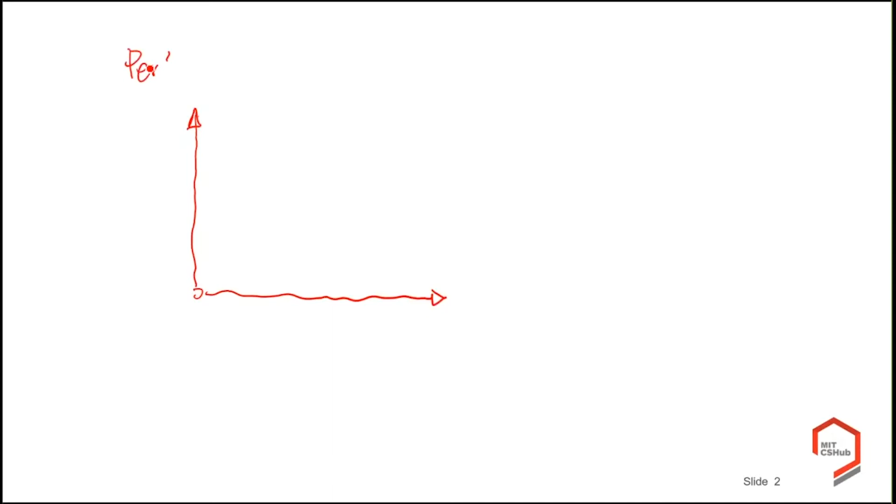So let's get started with the question we all want to address: what is resilience? Since we're in this online mode, I thought I'd start with some drawings about it. How do you define resilience? Since we're a little bit quantitative, we're going to make an XY plot here, where we put on the y-axis the performance of a system—a structure, an economy, social equality—and on the x-axis we put time.

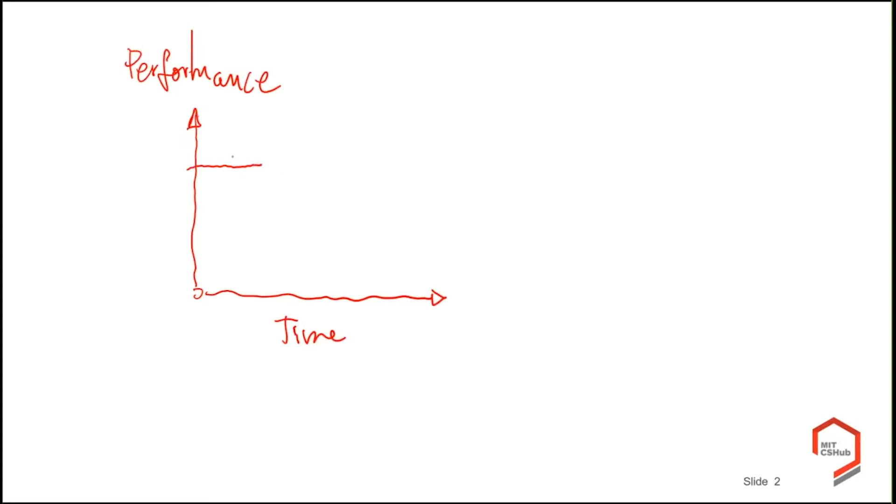Well, we're at a certain stage initially, and then an extreme event happens. You know exactly when this happened for COVID-19, and the system drops down in terms of performance. This drop has to do with the robustness of a system. But if it's robust, of course the drop will be less.

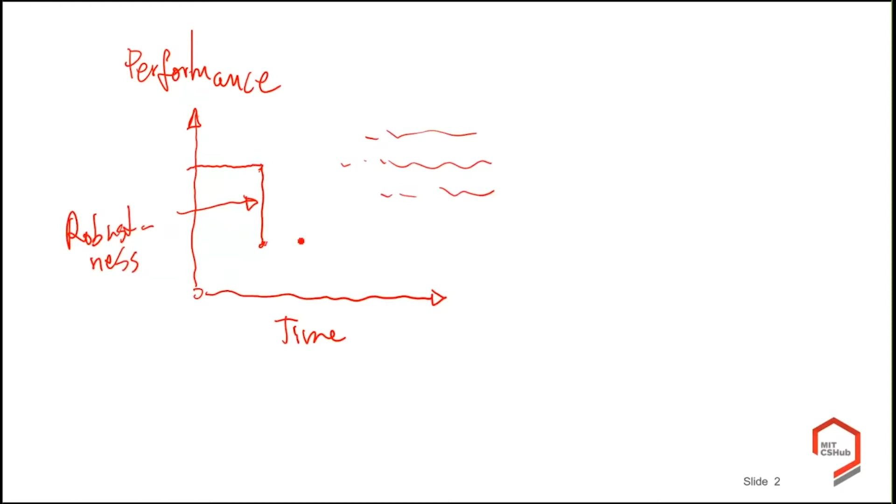But if such a system comes down, there's a second, very important part: what is the recovery? The recovery would be either to the same level or a higher level, wherever you'd like to have it. The question is, how fast are we able to bring this back to the same or higher performance of the system? Very important here for all of us in this current crisis is to ask yourself: what is the time to recovery?

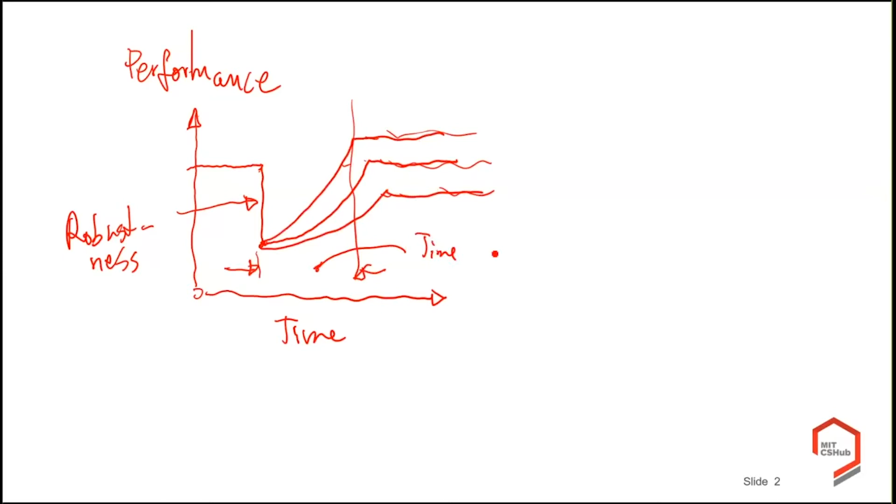Time to recovery is a very important topic for all of us. Currently, we know exactly what that means in the current crisis. But what I'd like to share with you today are the results which come out of this thinking of resilience in terms of building stock—national building stock, as well as community scale and city scale. So don't worry, I won't continue with my bad handwriting, and will carry on with my presentation.

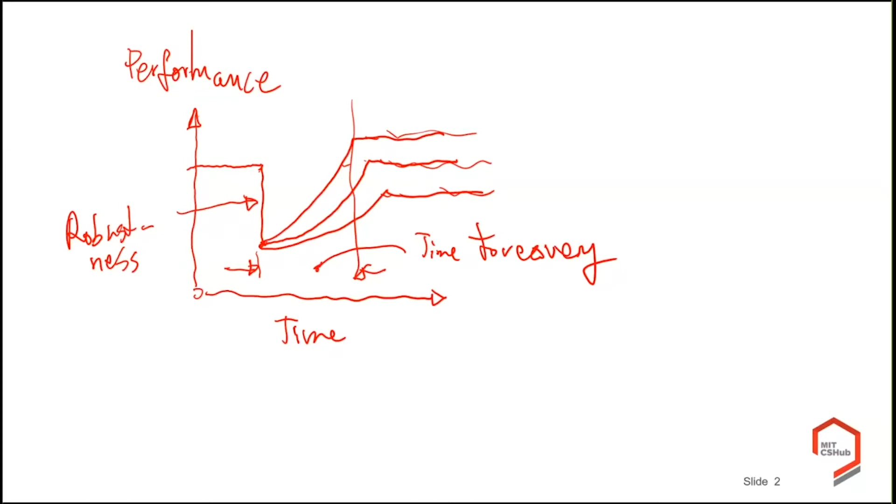So here you see the graph in a perfect shape. Resilience, in essence, is the time it takes to bring a system, after an extreme event, back to the same or higher performance. The systems we consider are cities, buildings, structural and non-structural elements of buildings, all the way down to construction materials. Otherwise said, it's a true multi-scale approach. The events we consider here are hurricanes, earthquakes, precipitation, flooding, and fire.

So our focus of research into resilience in the CSHub goes from the building scale to the community scale and to city scale, to address a critical thing: what is the return on investment if we invest in resilience of the building stock?

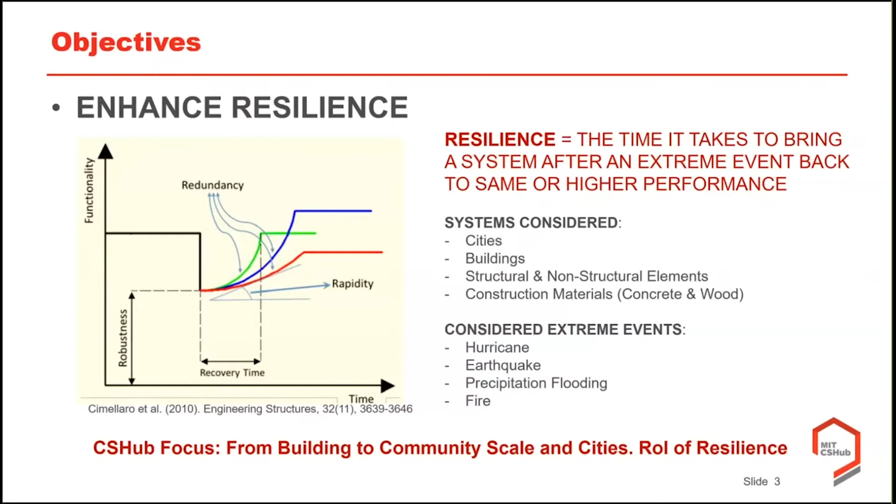So the topics I'd like to touch on today are: first, give you an update on where we're headed with hurricanes—the hurricane season just started a couple of weeks ago. And in past presentations on this topic, I hope I was able to convince you, if you were there, that city texture matters critically when it comes to the response at the city scale of building performance.

The second topic, closely related but going away from pure wind load, is precipitation flooding, which often comes with these extreme events. Here, the key question is how to quantify the flooding, or the damage caused by flooding, due to the time of flood exposure, and we want to address this also in relationship with city texture.

Finally, I'm going to address a topic of high importance for many of you, which is fire, high temperature exposures of buildings, be it for safety reasons, when you are a firefighter or an inhabitant of a building, or whether it is at a community scale, where you ask yourself, will there be a spread of fire?

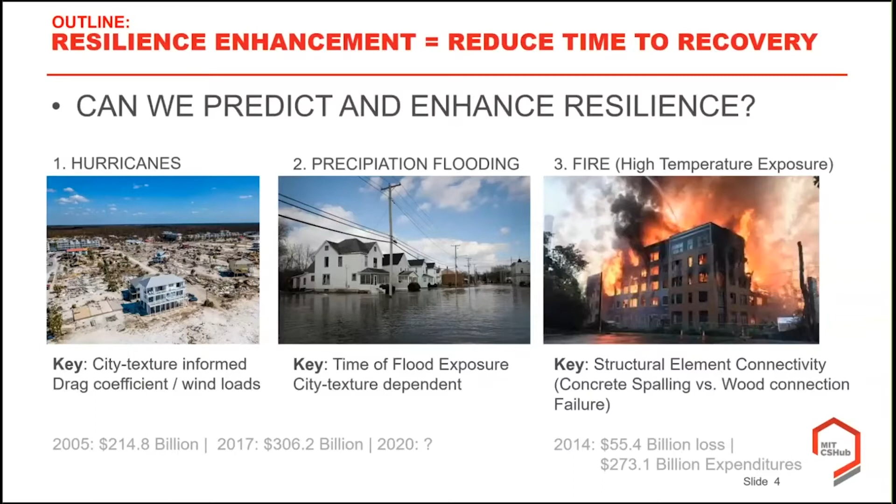So with this in mind, let me start with the first topic, which is hurricanes, from city texture to social impact. The question I ultimately want to address is the socioeconomic impact of hurricanes and how one can reduce it.

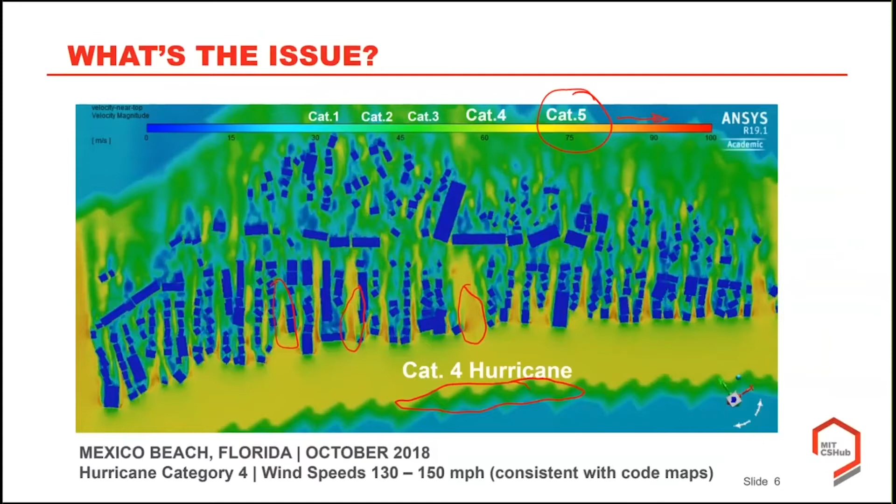What is the particularity of our approach? The current approach used in design codes is basically to design buildings for a wind pressure P, which scales with the wind speed to the power 2 - the far field wind speeds, which are codified, for instance, by the American Society of Civil Engineers - multiplied by rho, the density, but most importantly here the drag coefficient CD, often taken as a single building value for evaluation of this pressure.

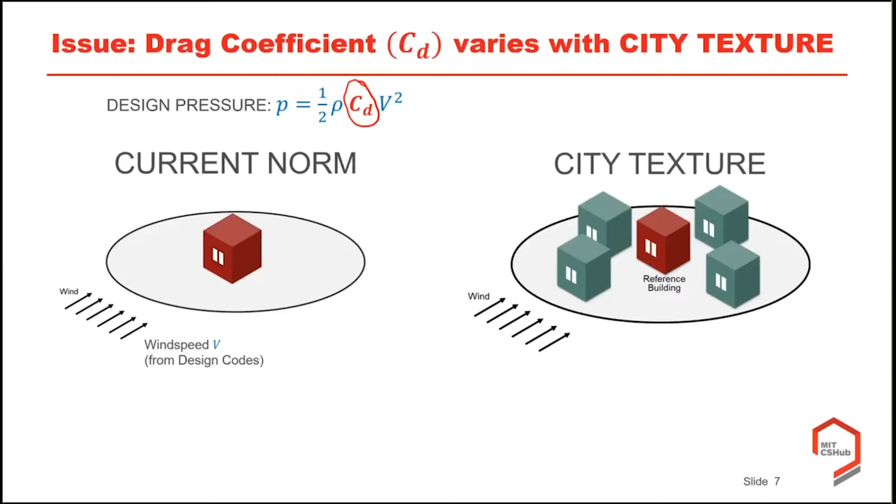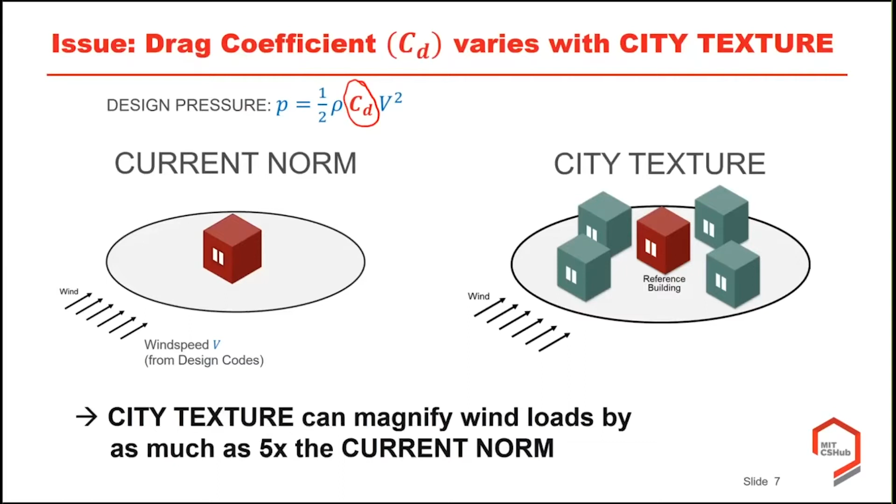This pressure is then used to design the building. What we propose here is to consider, in addition to the far field wind speed, the effect of city texture on a building in its certain environment, its first shell. As we found in this study, city texture can actually magnify the wind loads for which buildings should be designed by a factor as much as 5 times what current design codes require.

Now the approach here, after much work, comes down to evaluating this drag coefficient in the following form, which has two terms. One is the classical term currently in use - this part here. The other is the city texture effect.

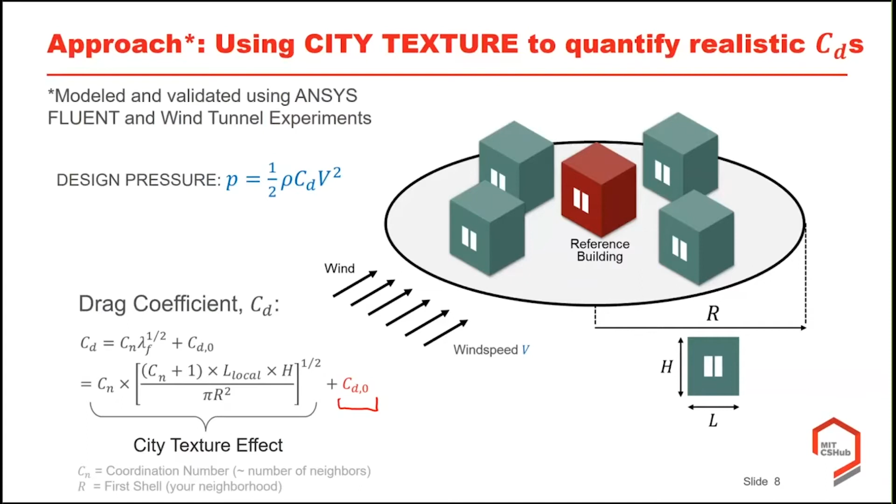That city texture effect has to do with the dimensions of the building or surrounding buildings, particularly at the local scale. But most importantly, two factors come from city texture analysis: CN, called in statistical physics the coordination number, basically referring to the number of neighbors, and R, the first shell, basically the environment in which your building takes place. This data is available and can be calculated for each building using information about building stock readily available on the internet.

So to make my point, if you look just at Mexico Beach, at the drag coefficients of these buildings and evaluate which should have failed because the amplification due to this drag coefficient related to texture was much higher, you can cover something like 67% accuracy of the actually damaged buildings. This means the relevance of this approach is evidenced by the observation that pressure amplification due to city textures is significant.

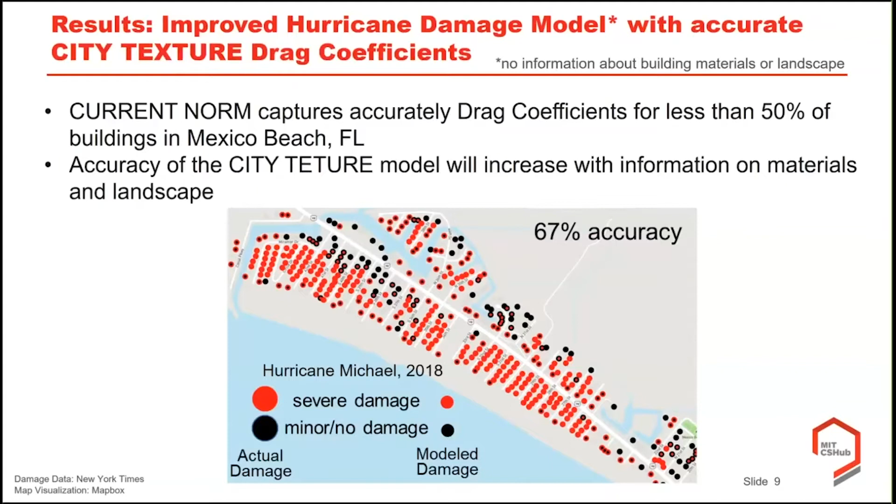More importantly, you can ask yourself what would happen if you now start redesigning the city. In fact, you look at taking out buildings and seeing how the number of neighboring buildings would change, and how that would ultimately affect the drag coefficient.

So you see we have buildings here on the left side. We're taking out a number of individual buildings to reduce the number of neighboring buildings, and by doing so, the drag coefficient reduces. In fact, you may want to see this as a damage curve. If a building is destroyed, what are the other buildings subject to, and why isn't everything destroyed after a hurricane?

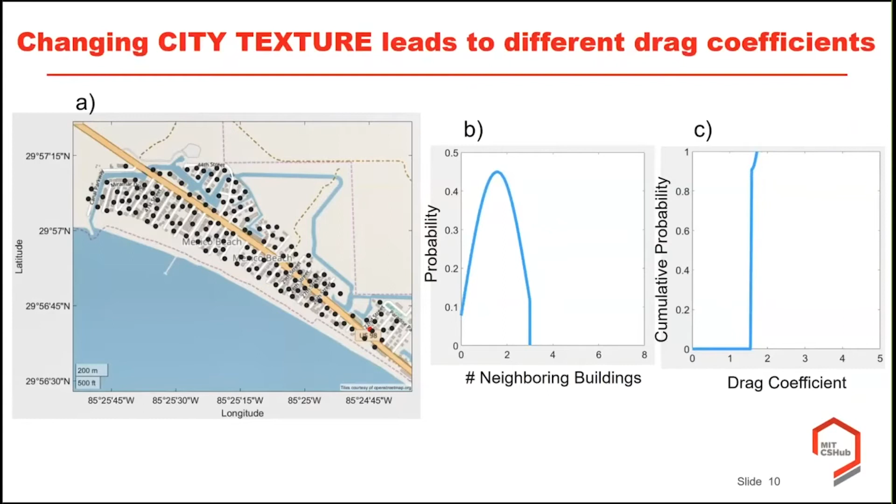In fact, the key question here, which comes out from these simulations, is that we can either think about redesigning our cities, which is unlikely because we cannot reduce the density of the cities in much way, but more importantly, thinking about how to design our building stock more safely by taking into account these city texture effects.

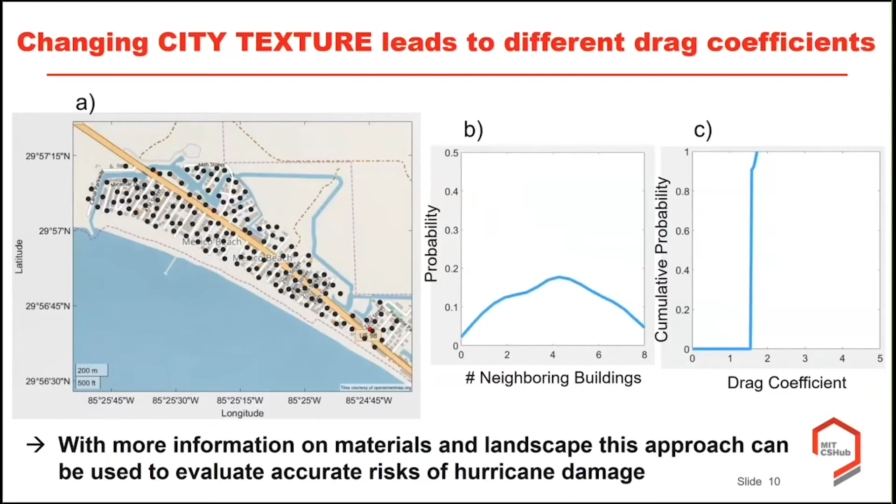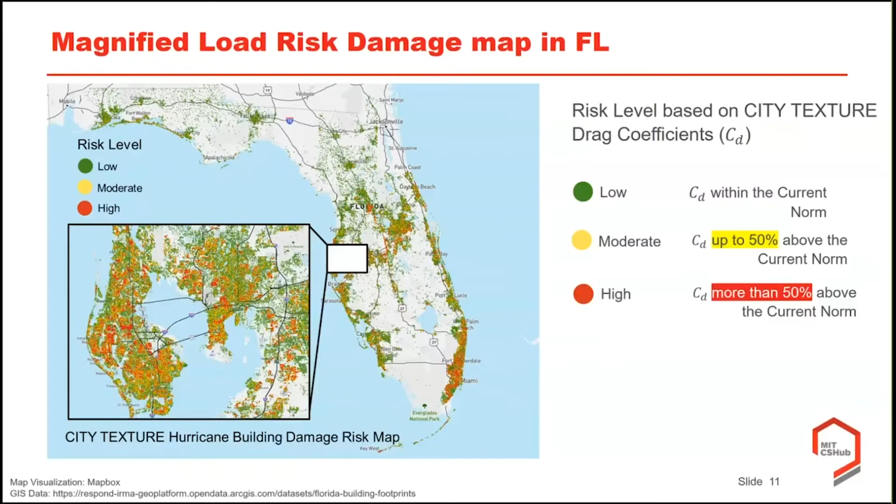Wind speeds amplified by city texture. And you see that some neighborhoods may be at much higher risk of damage. You see it here in red. Many other buildings will not be.

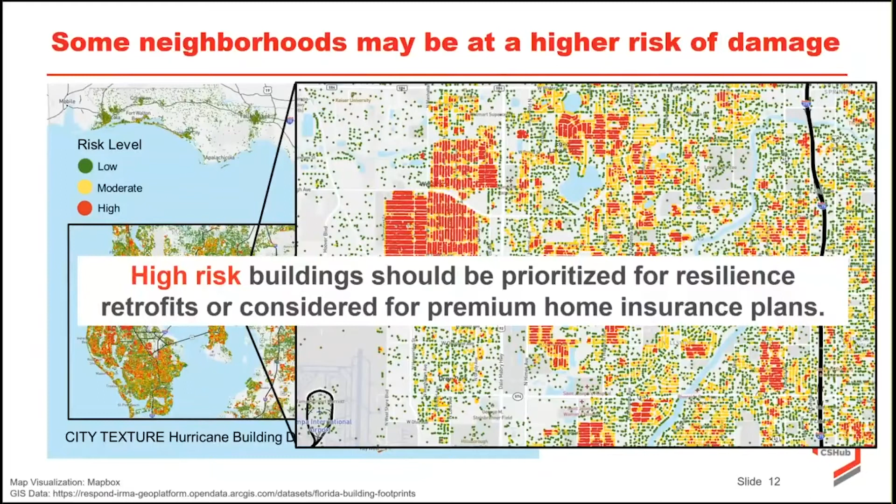So there is a clear impact here, which is that high-risk buildings should definitely be prioritized for resilience retrofits, or eventually considered for premium home insurance plans. Otherwise said, there needs to be some action in order to retrofit our building stock to reduce this high risk of damage due to city texture effects, the way how we like to live and build our building stock.

But what are we missing here? We haven't talked yet about the building itself, what happens to each one of those buildings, and that's critical information as we bring the topic back to resilience and want to know what is the time to recovery.

So we need two more pieces of information. One is the damage inventory for each individual building, and the other is a link with the bill of activity in order to identify the benefits of mitigation by resilience enhancement.

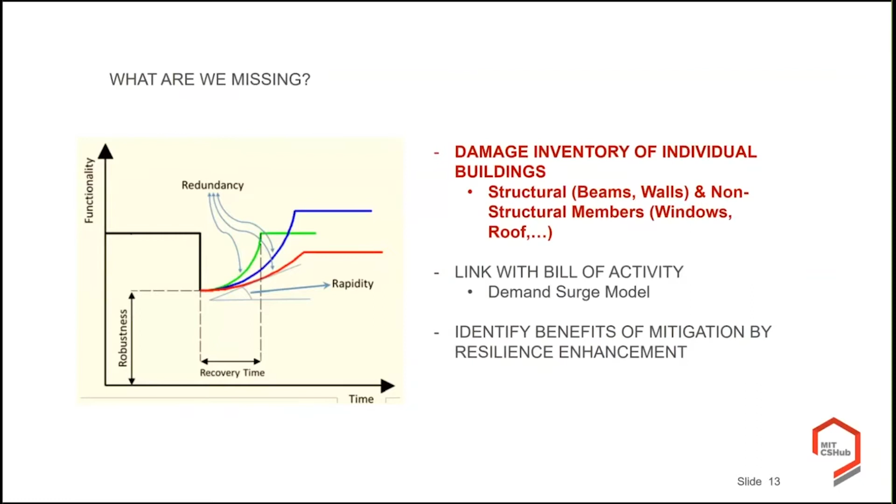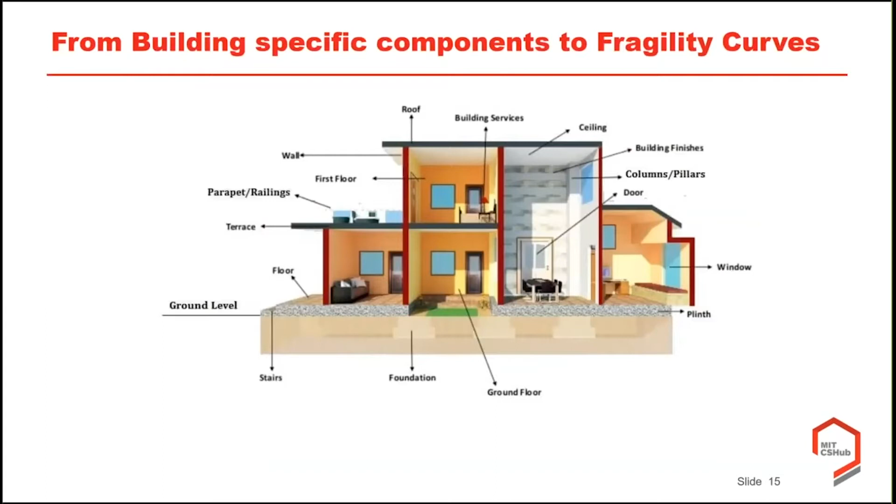So fragility curves here consider all the different building-specific components, including structural and non-structural members. An example of our approach is illustrated here in this five-story building. We discretize the structure in terms of masses and put all the information we need in the bonds, in the connections of the beams, walls, windows, roofs of the system.

Here, the example considers a core or not. I'm going to show you some simulations with a core in order to develop a quantitative means of determining what is the risk of damage from a probabilistic point of view to these structures.

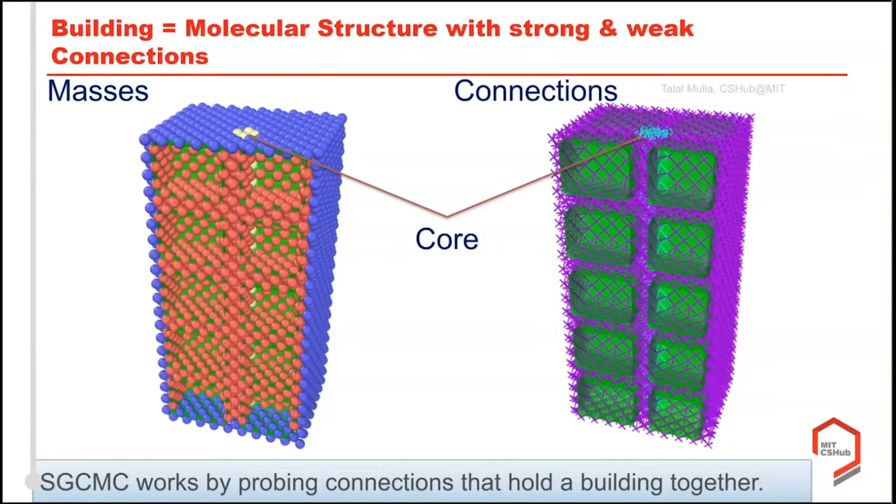So my first structure here I want to show you to illustrate this approach is a typical reinforced concrete structure which has interior walls, a building envelope, and so on. And what the approach actually does is we probe all possible connections and see which ones are most likely to fracture given a certain load which we have in the system.

So damage, and you see here in different colors the failure of the interior walls, some elements of the building envelope, but the building core here for this concrete structure is completely untouched.

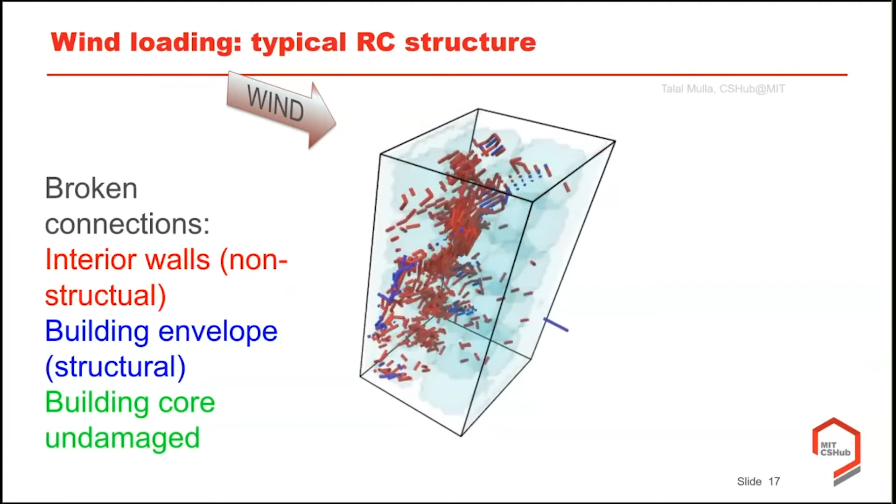So despite the fact that both structures were designed for the same maximum load, given these wind loads we're able to quantify the likelihood of damage to structural or non-structural members. Just as a last example, what would happen if this was a wood structure without a core?

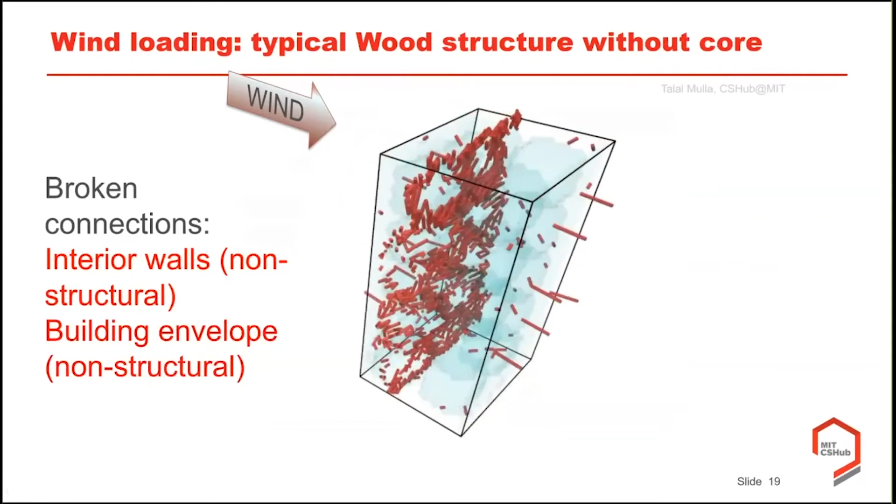The interior walls would still be non-structural, and the building envelope also non-structural, but with walls in there. You basically find out how the structure fails. This is not a structure you would design, of course, in this form, so you have a high level of damage.

All this allows us to qualitatively classify, for reinforced concrete structure versus wood without structural core, for this particular example, from no damage to high damage of the system.

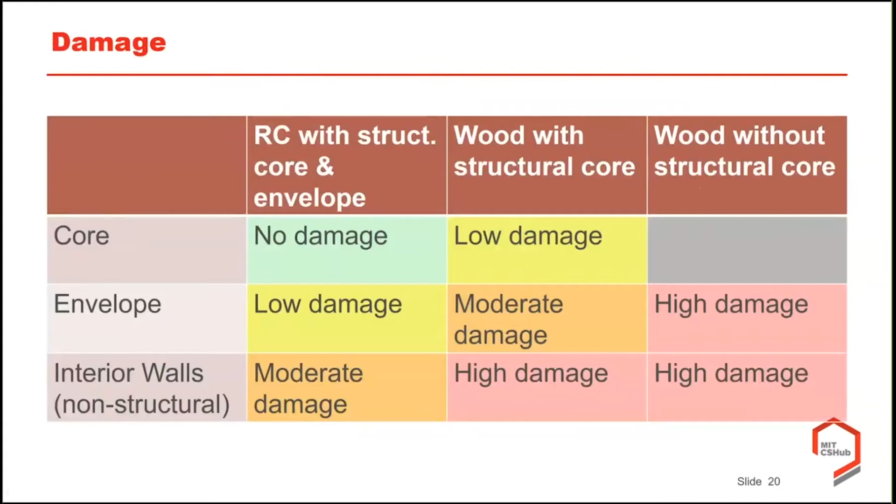But more quantitatively, we took all this which comes out from simulations into fragility curves, which express the probability of exceeding damage in the building. If you take this probability of exceeding for any type of value, so a horizontal line into the system, you will find that...

the inventory, the one which is first touched is the wood, until it comes to reinforced concrete structures. Otherwise said, we can synthesize into material-specific building type fragility curves the information, and use them for different buildings, integrating the failure of non-structural and structural members.

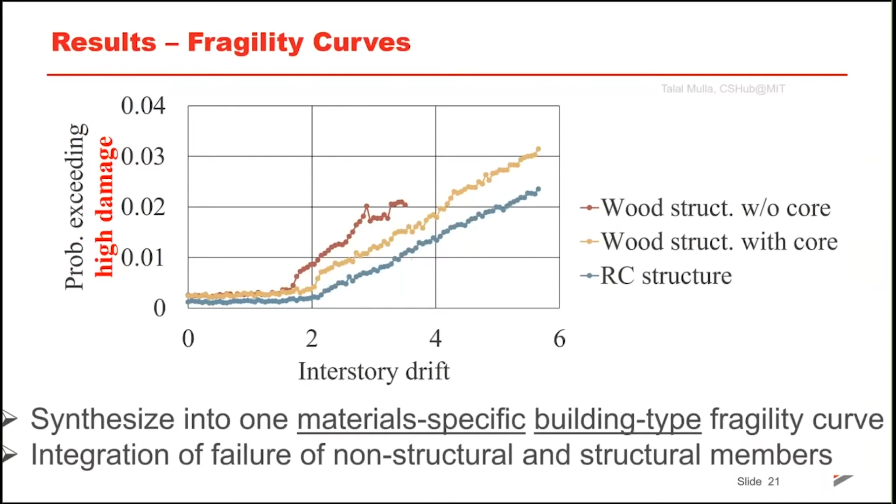Now, with this in mind, we can take it to the next level and connect this damage inventory by linking it with the bill of activity, while considering that after an extreme event there's a demand surge, simply due to the fact that you don't have enough carpenters to work on repairing the damage, so the prices simply go up.

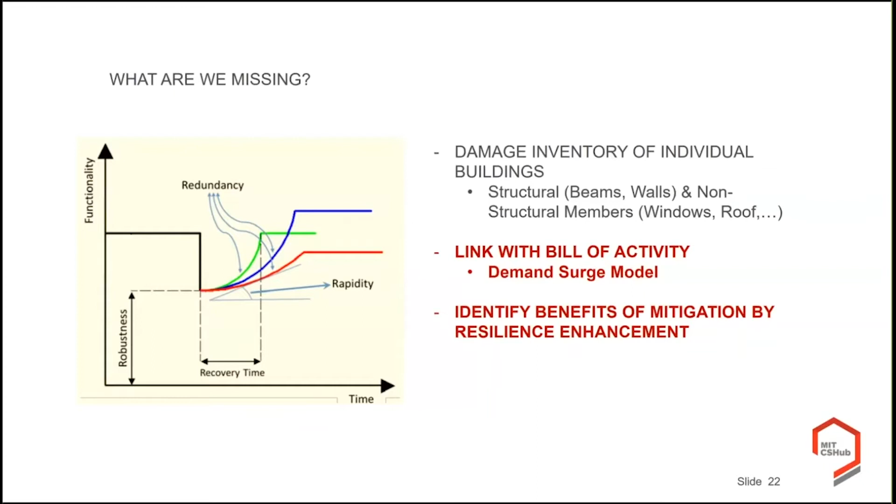Combining the damage inventory with this bill of activity provides us, for each building, a means of evaluating the benefit if we were to mitigate via resilience enhancement. This is some work done by Ipek Bensu Manav in the CSHub, which basically integrates the following.

One is the hazard risk, which is simply the probability of occurrence of a hurricane. What's currently done is consideration of surface roughness or terrain, but in addition, what we now consider is this urban texture effect, which I started with today.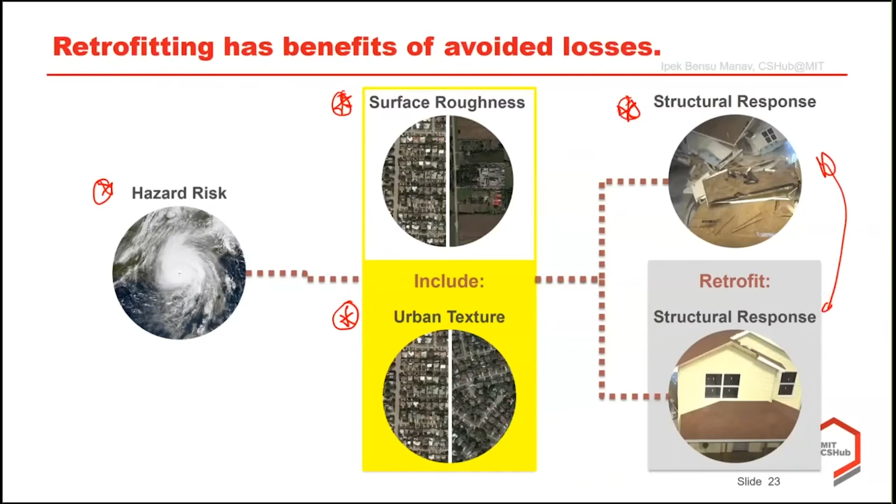Finally, we determine the structural response for each of those buildings, and then look at what would be the means of retrofitting these structures in order to reduce the damage, by means of the fragility curves, changing them from the original solution to a retrofitted solution.

What turns out is, if we consider this city texture approach, this texture-informed approach, the statewide benefits which result from mitigating the damage quickly increase. For instance, in the classical approach, without considering city texture, there would be, for the state of Florida, maybe on the order of...

2.6 million homes that have a payback within one year, and the total statewide benefits would be on the order of $4.8 billion per year.

By contrast, if you consider the texture-informed approach, such an investment actually has a much higher return, both at the state level and for individuals, as statewide benefits are up to almost $20 billion a year, and we're talking about 4.2 million homes having a payback within one year, given the high level of hurricane risk.

We can take this all the way to the state and look at the benefits of mitigating hurricane damage by means of this resilience enhancement, to map at the state scale the dollar amount which households obtain, and identify the areas where mitigation would have the highest financial impact for individuals.

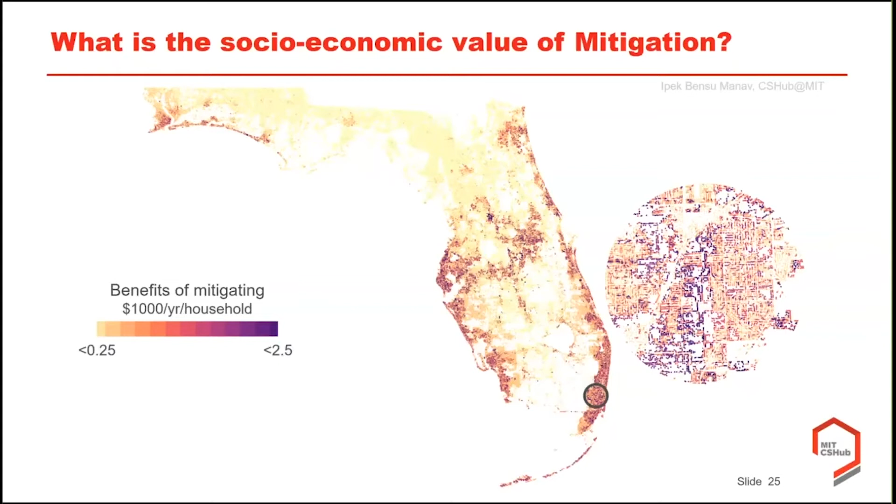A similar approach which you've now seen for hurricane can be applied to precipitation flooding, which is the next research project we started last year in September, looking into the impact of city topology and texture related to precipitation flooding. Now, a word about the classical approach to how precipitation...

flooding is typically addressed, and commercially available solutions are based on so-called shallow water equations in most cases, consisting of following the flooding, or the height of water over terrain, in time and space, considering different issues like the 3D terrain network, soil condition, permeable or non-permeable surfaces, structural objects, bridges, pipework, etc. But this would be for a very particular city or area, in order to determine what the risk of flooding is.

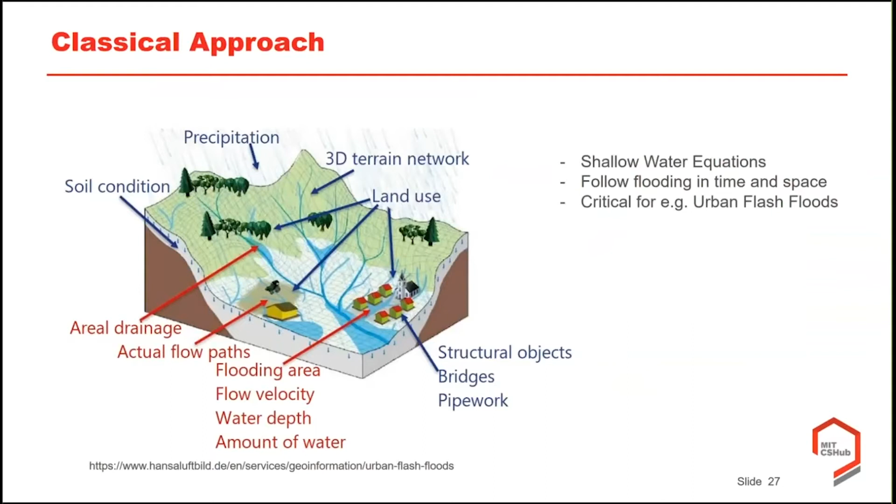It is critical if you're looking into urban flash floods, for instance, where you need to take into account the relatively short time of the precipitation, which entails, for different reasons, a flood locally in a city. Now, what we are looking at is slightly different.

What we are interested in here is the damage, to evaluate and estimate the damage, where we look at the time of flood exposure. The longer the time of flood exposure occurs, the more damage it will do to the structure. So a key question our approach looks into is how much flooding is reversible and irreversible in terms of close-to-equilibrium conditions.

The approach we develop here in the hub is based on what's called density functional theory, a technique actually developed for nanoscale adsorption processes. The idea basically is that you put a material in contact with an outside bath defined by some chemical potential, and you ask yourself where, at the small scale structure, this outside liquid or gas will adsorb and develop from this so-called adsorption and desorption isotherms.

Now we adopt a similar type of approach for the flooding problem by analogy, considering all types of features relevant to this problem of precipitation flooding. Meaning, we're interested in buildings, the terrain, the topology of the city terrain, drainage systems, soil type, whether it's low or high permeable, and so on. So what we do here is apply an outside precipitation source to the system, and the simulation technique determines where water will accumulate at equilibrium for each precipitation rate applied. Now this allows us to determine what we have coined flooding drainage isotherms.

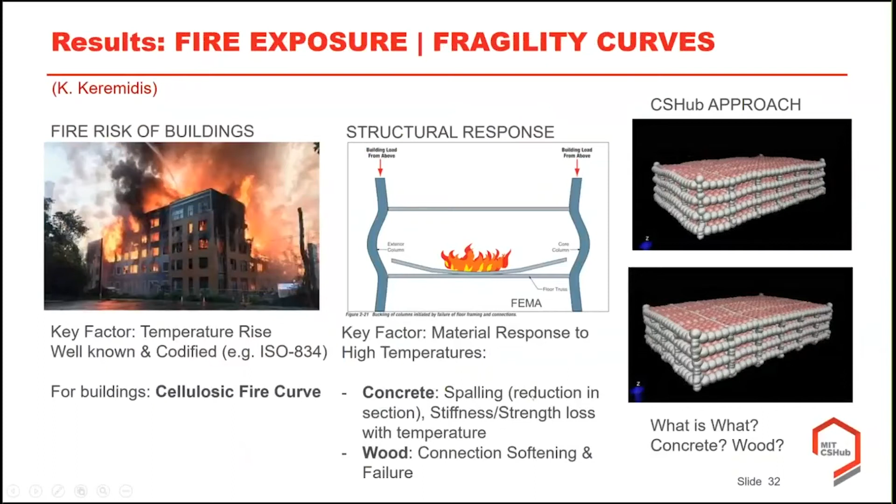So what are the key factors which define fire safety for such buildings? Let's start with wood. Charring typically occurs at 300 Celsius and above, and propagates inside the material. That's what we typically think about when we worry about wood fire. But there are many other phenomena at the material scale, such as material softening behavior, meaning the strength and stiffness of the elements degrade substantially, independent of charring but as a function of temperature. In addition, very critical for wood structures is the softening of the connector resistance when exposed to fire.

When it comes to concrete, the equivalent of charring is thermal spalling, the phenomenon where concrete exposed to high temperature kicks off layers, very similar to the layers of an onion, thus reducing the effective section of the system. In addition, it undergoes material softening, so strength decohesion and stiffness reduction, what we call thermal damage, which are more or less well understood. If you compare the Young's modulus or stiffness with a reference stiffness at 20C, you see this decline with high temperature exposure of materials, as one can find in a laboratory.

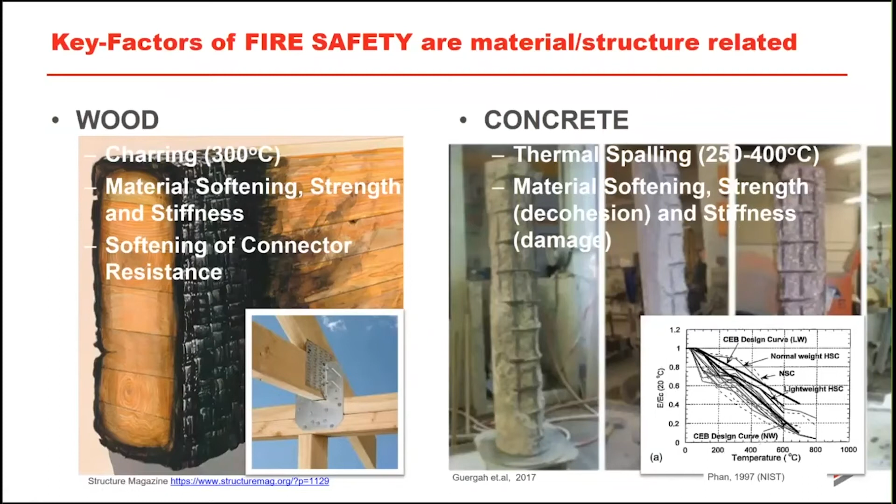So how do we account for that in our approach? Similar to what I showed you before about the molecular approach with wind loads, we use molecular dynamics, a potential of mean field type approach, where we discretize a structure in terms of mass points at some equilibrium configuration, its initial state, and describe the interactions between these mass points by stretch potentials on one side and bending potentials to capture bending elements in such structures. Of course, the key information for these potentials is the type of material and the type of structural use or element being taken into account.

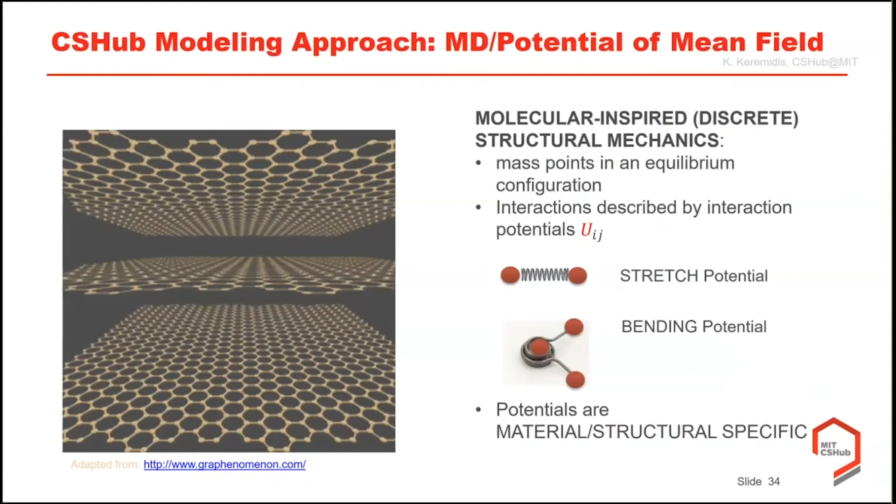To show you this interaction potential, let me start with concrete spalling. What needs to be taken into account? As I've mentioned, one key phenomenon of concrete exposed to high temperature is this spalling phenomenon. The propagation of this spalling front typically occurs between 250 and 400 Celsius, and it effectively reduces the effective section of a structural element. But there's another phenomenon in place: the remaining column is subject to thermal softening, meaning the stiffness and strength go down.

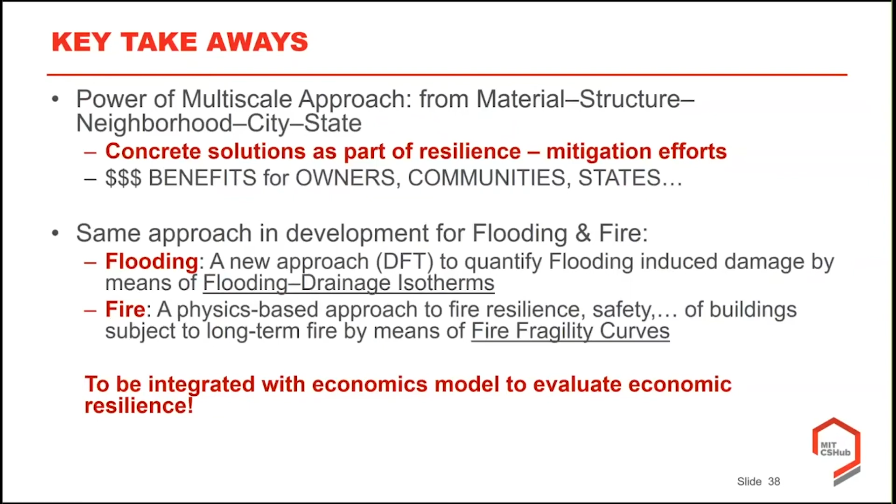What's in the making? We're still looking at hurricane resilience enhancement. As we all can't wait for this COVID-19 crisis to be over, we know there will be a need for federal and state stimulus packages. I think it's a good time to push for science-based resilience enhancement, as we cannot afford this type of damage, both financially and socioeconomically.

On flooding and fire, we have an approach in place, and the proof of concept has been given. We're now going all the way to neighborhood and city scale with city texture features, and integrating them with the economics model.

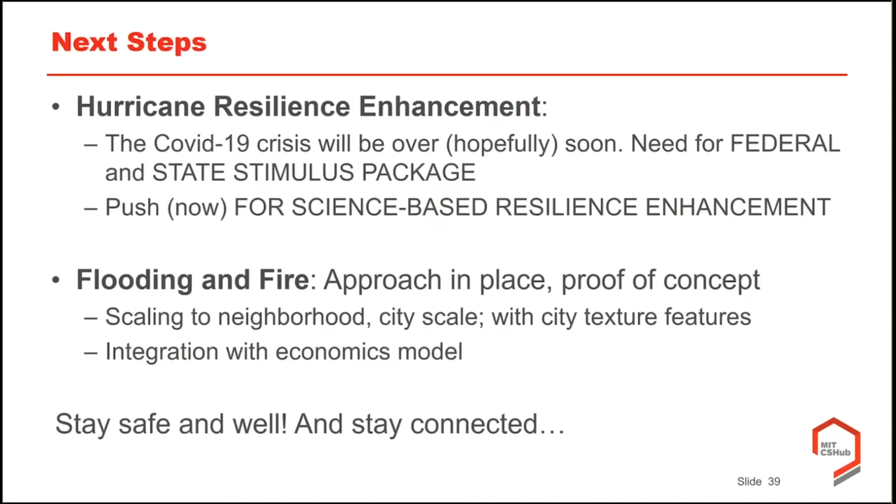One more question we have is, what about bolt failures under fire? Yes, this is actually a very interesting topic. So this is basically shown in this graph here - it's not from us, I looked into different literature, and there's a very interesting phenomenon here.

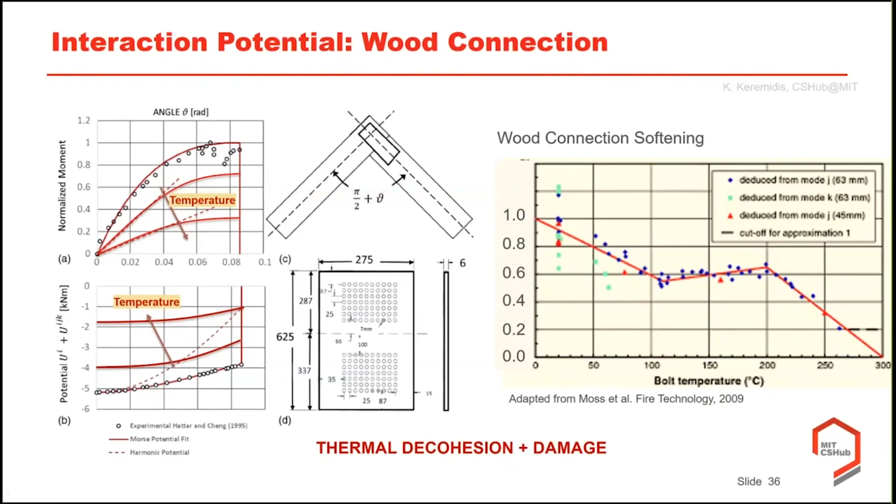This graph shows the reduction of the strength of a connection as a function of bolt temperature, which people have measured. As the bolts quickly reach the temperature they are directly exposed to, you see a very quick reduction of resistance to almost 50%, up to 100 Celsius. This happens basically immediately whenever you have a fire. It then stabilizes until 200 C, and then goes all the way down at 300. Some people say there may be some residual strength here, around 20%. But at 300 Celsius - and you need to put this in connection with the temperature rise one would consider for such a design - we're talking about a couple of minutes.

In that time frame, you basically start losing those connections, unless you extra-protect them with extra layers. There may be some solutions out there, but these connectors will be much more bulky - not as elegant as they are currently used in the wood industry. Bolt temperature reaches 300 Celsius after a couple of minutes, and experiments show that at that point we've basically lost this connection. This is what we find in the simulation - you see here how quickly the wood fails, and the reason is primarily the failure of this wood connection.

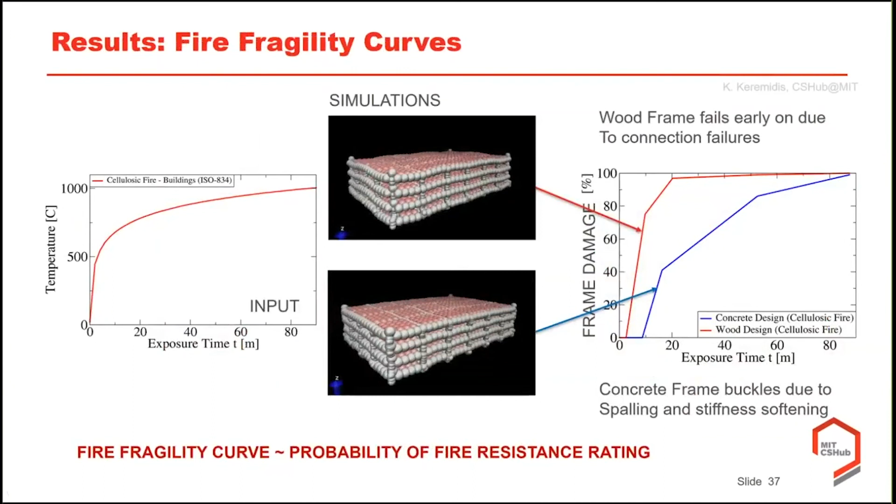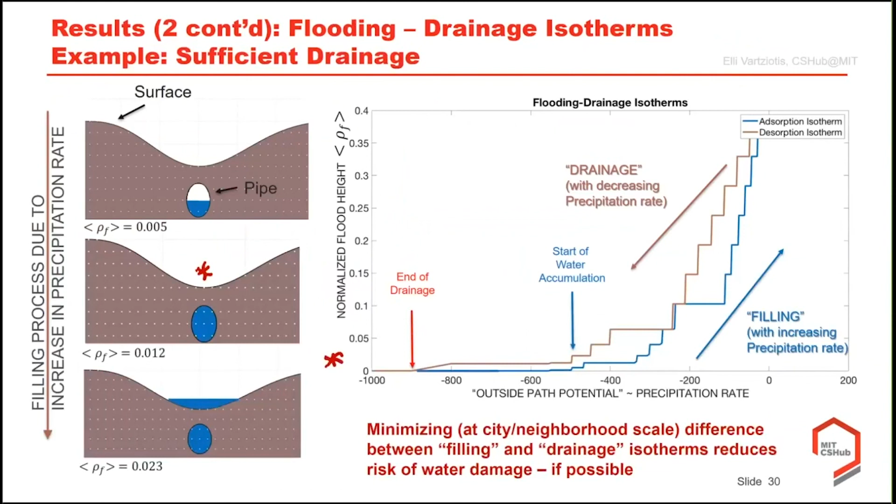One more question: what parameters and features are most important for developing city texture for flooding, and how is it different from hurricanes in the input data for the models? Yes, there are quite a few. The key factors of city texture will always be there, but you also have a third dimension - the terrain. Second, you have a drainage system - pipes and rivers, etc. - which classically do not affect, or have a rather negligible impact on, wind speed compared to the problem of flooding.

So the texture effects are what we aim to study. We don't have the results yet, but we have the same type of approach in place where we're going to consider neighborhoods and characteristic city textures. The new elements are characteristics which relate to the terrain topography and to the drainage system - these are the two additional quantities that come in.

And then one more question is, since the building code has a probability of collapse inherent in the design provisions and concrete exhibits much lower probability of collapse at the design loads, are wood structures under-designed, or do concrete structures have excessive capacity?

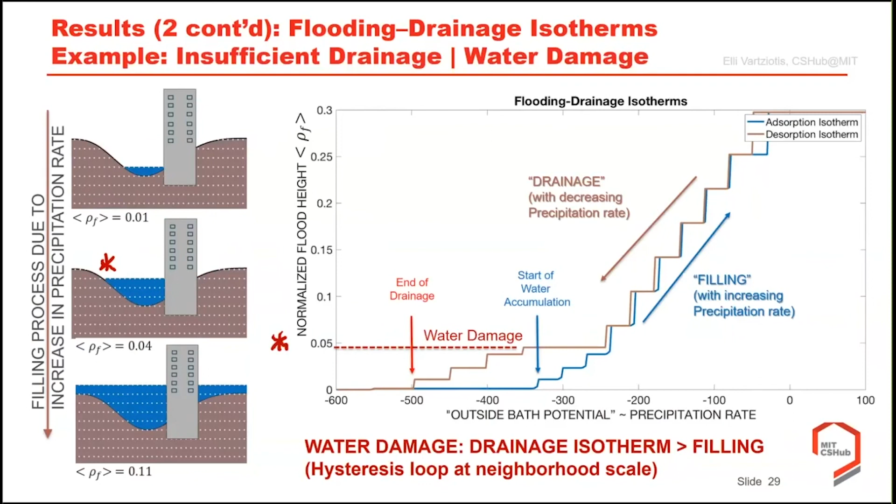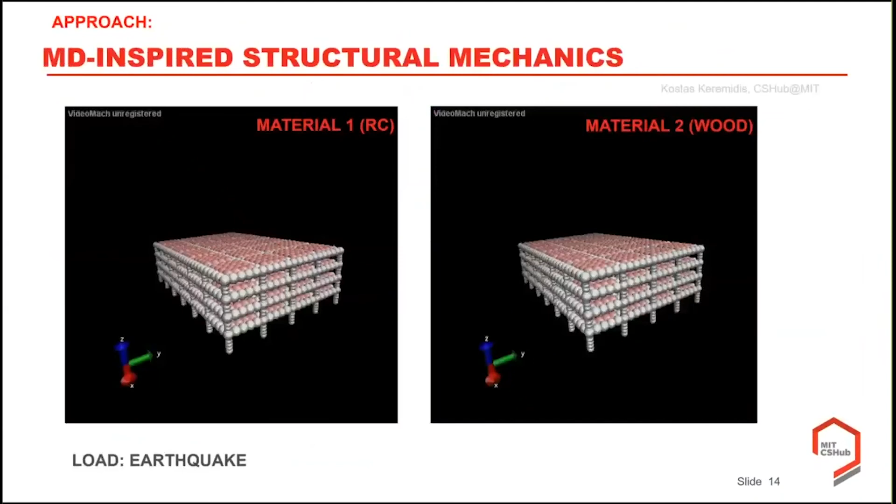What I have currently is what would be the return on investment if I go from structure by adding into it a resilience enhancement of the structures, showing that with this approach one can identify the return on investment at the level of a building, for an owner, up to the level of a city.

I think there's more still to be discovered there related to socioeconomic impact, by which I mean if a family with a $50,000 income compares with a family with $200,000 income, and you compare the return on investment or the benefit in thousands of dollars, it has a completely different order of magnitude. I think it's worthwhile to identify this benefit with regard to the income level of these houses. That's work which is feasible thanks to census data. I hope to report this to you soon.